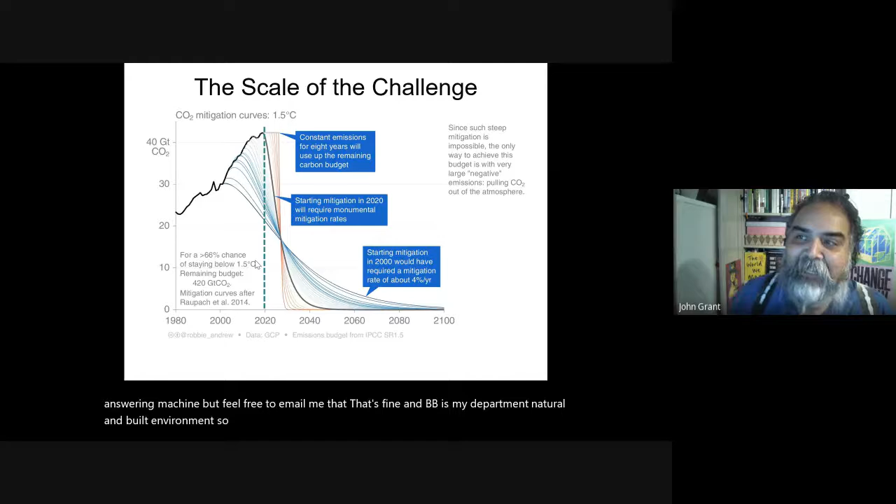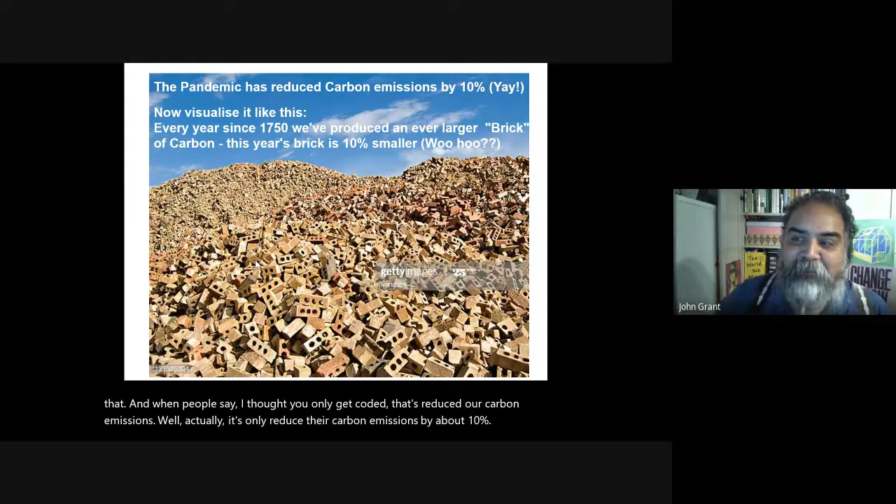So here we are in 2020, and this is our carbon reduction curve requirement. So if we're going to meet the 2050 target - and I don't know about you, but as much as I wish that humans are capable of great things, I find it an extraordinary curve for us to actually follow. And when people say, 'Oh, it's all right, John, we've had COVID, that's reduced our carbon emissions,' well actually it's only reduced our carbon emissions by about 10% for 2020. So if you imagine a brick of carbon being produced since 1750, then our 2020 brick is 10% smaller. And we're pretty confident now that extreme weather events are, in some calculations, 30 times more likely in the UK.

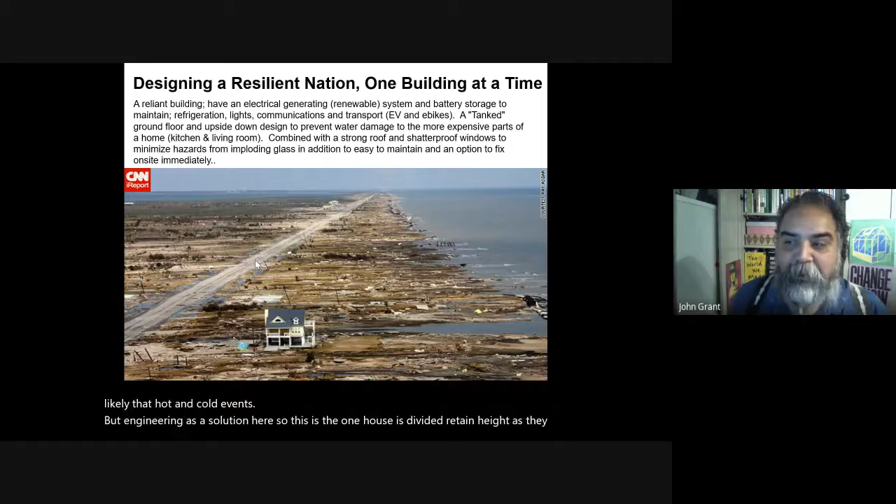Heavy rainfall events are 30 times more likely, and hot and cold events slightly less, but engineering has a solution here. This is the one house that survived Hurricane Ike because they'd sprung for the sustainable and resilience options on their house. I found it the most extraordinary picture.

That's what they were kind of talking about. It's not rocket science. Everything I'm about to talk about today is already developed. There's nothing novel.

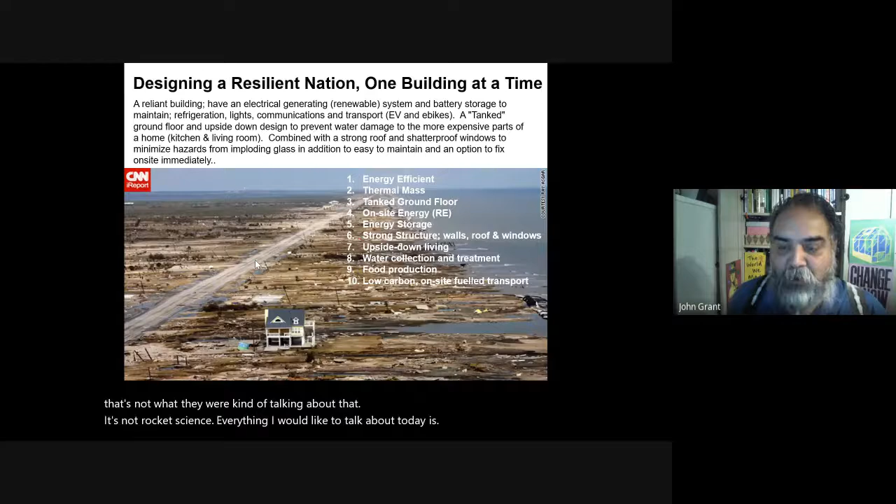Now, the government has proposed this as our 2030s house, and I find this sort of appallingly embarrassing, in that we've already surpassed this in every way, arguably 20 years ago. So this is their house for 10 years from now. But 26 years ago, the first autonomous house that I'm aware of in the UK, in Southwell, Nottinghamshire, was built by Robert and Brenda Vale.

This was autonomous in energy and water, not food, but highly insulated. And they, 6 years later, built these at Hockerton nearby, which actually, a bad year, get this, is 30 quid on utilities.

So this is a bungalow, earth sheltered, linear layout, so all the rooms face south, with a sun space that keeps it warm, and they have no primary heating source in there, just an insulated concrete box that uses the sun and ambient heat capture from uses within the building.

I've been following this for 20 years. I was actually involved in it, not in the construction, because that was the Vales, and it was a self-build, but I was involved in the renewable energy system. So I helped them with their wind turbines because they were having problems getting it through council.

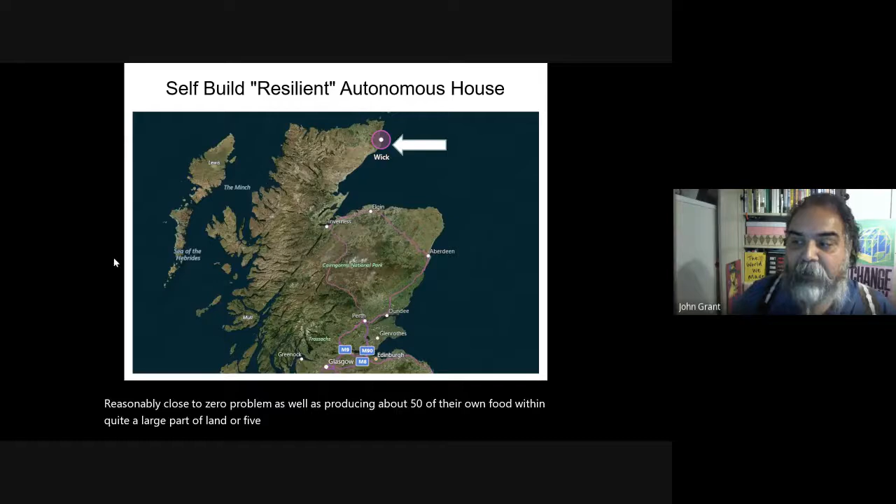So switching to my house, it's about as far north as you can get, Wick, about half an hour from John O'Groats, heading north from there. It's a great location, although not the most inspiring on the east coast. The reason I picked it was that the road's to the south of the plot, which means you can't build anything that will shade me, which was part of the design.

And there's a burn, as they're called up there—excuse my Scottish accent, I don't have one—which has got fresh water, which feeds into the local whiskey distillery. So it's good. It's good enough for them, it's good enough for me, is kind of the logic to that.

But quite a large site at almost a hectare, and only 30k. But don't share that, so I could repeat this. It's a public road on there and everything, and adjacent to the oldest castle in Scotland, would you believe? Which is the most boring castle—that's why nobody's ever heard of it. It's a really boring little brick square.

But yeah, so historical, and the fact that this house sits on a concrete raft made simplified matters with regards to digging that.

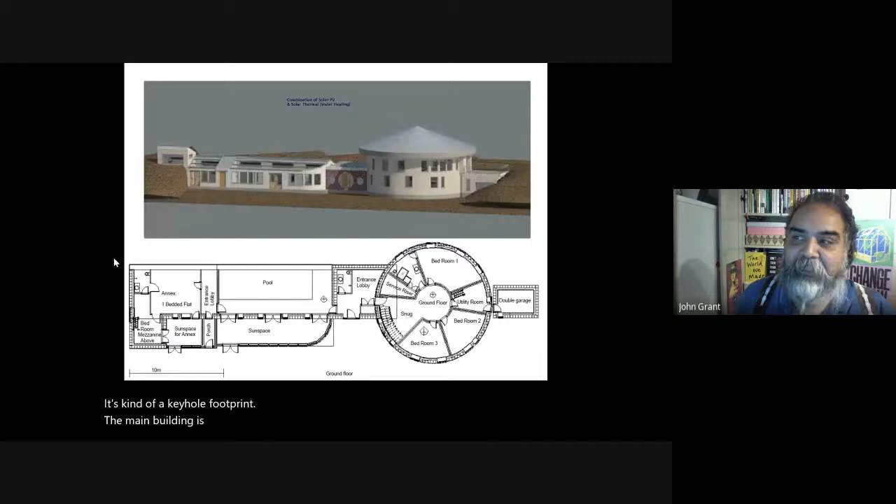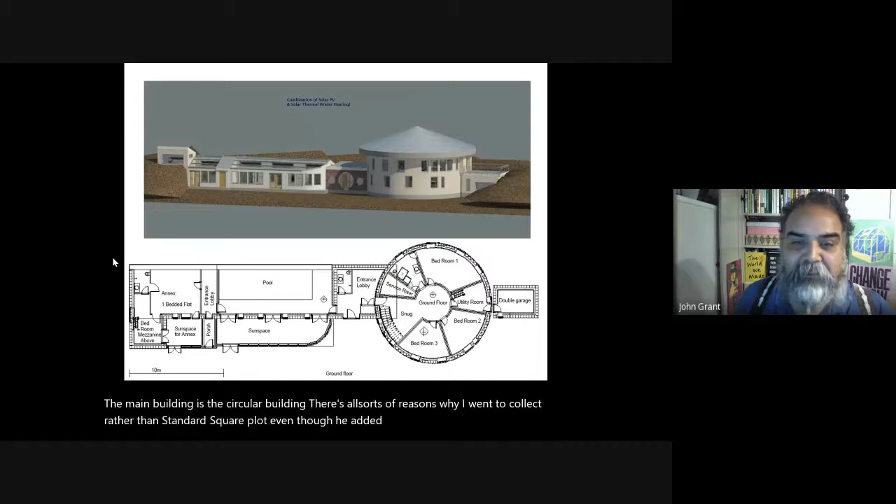So, no significant foundation - this is the design as it stands. It's kind of a keyhole footprint. The main building is the circular building, and there's all sorts of reasons why I went circular rather than a standard square plot, even though it added about 5 to 8% to the price. But I'm using insulated concrete formwork, which actually isn't as expensive to build curved walls with as it is with brick and block, and you get huge advantages in terms of structural strength.

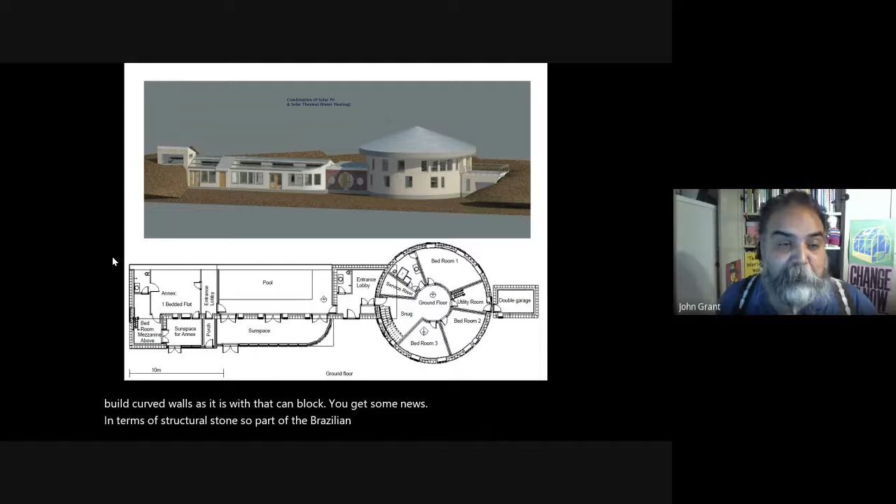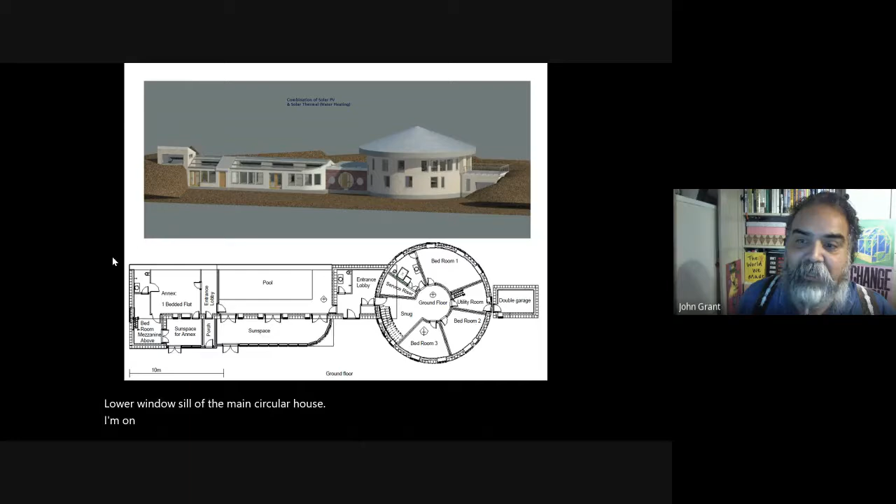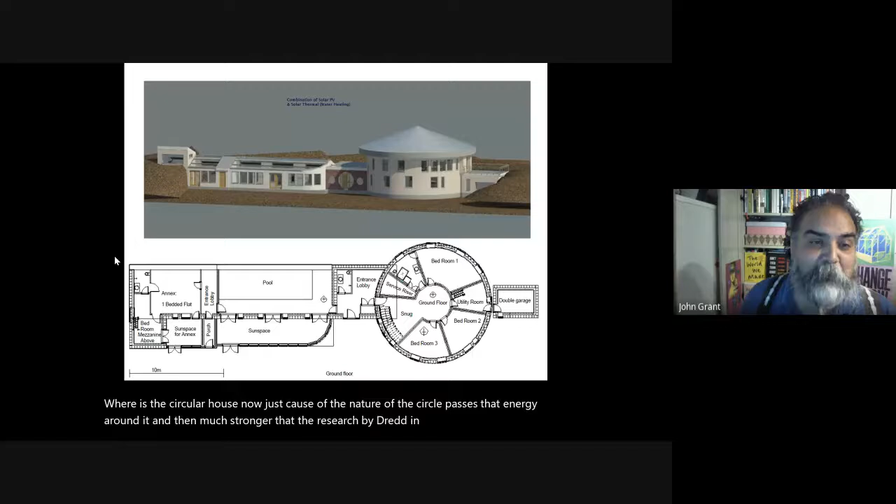Part of the resilience element of this is that it's flood-proof to the lower windowsill of the main circular house. If you build a house that is tanked, like an inverse swimming pool, and it's square, you have to really reinforce the walls because they buckle. Whereas a circular house, just because of the nature of the circle, passes that energy around it, and they're much stronger to that. Research by BRE, in their flood tank, built actual buildings and flooded them up to a meter and a half. They've been easily able to build buildings that are structurally and waterproof capable, but they crack over time, and that's not talked about much. So actually they've got strategies for letting the water in to equalize the pressure - I wasn't comfortable with that.

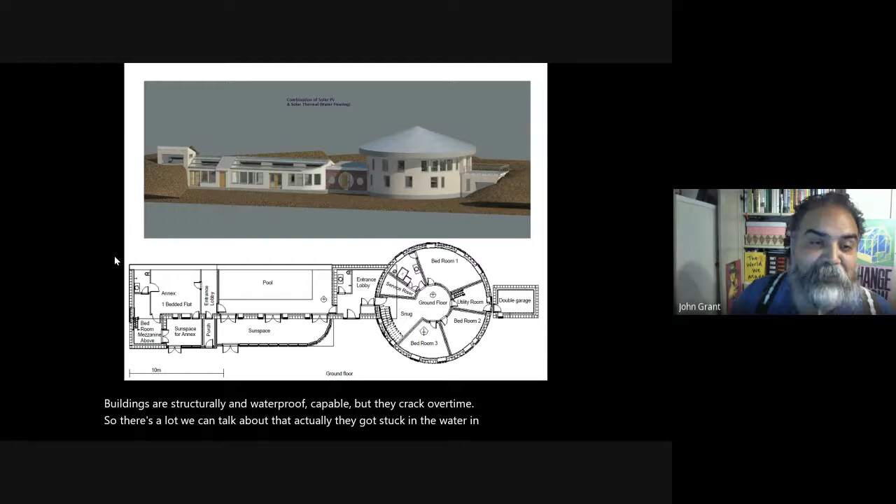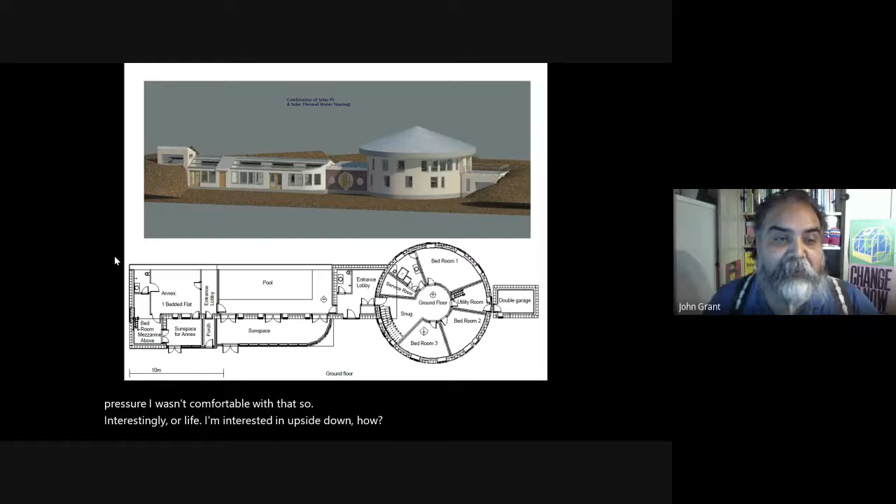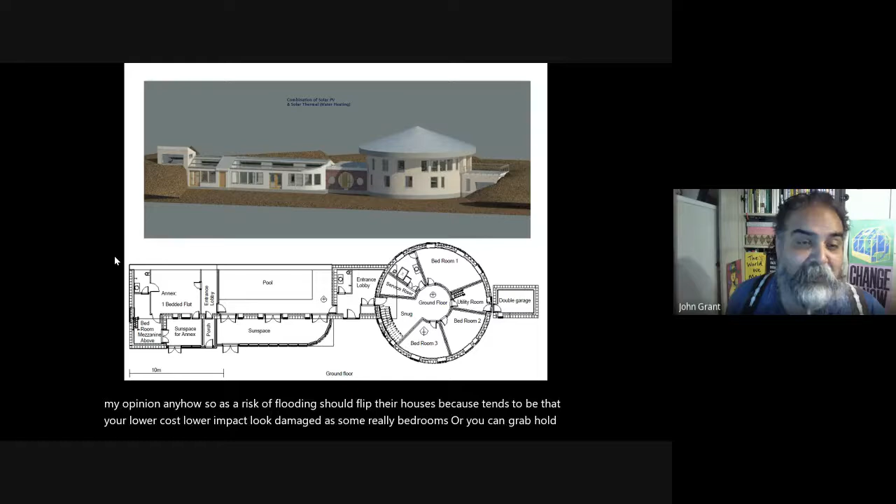So that's the main house. Interestingly, it's an upside down house - the bedrooms are downstairs, the living rooms are upstairs. Another flood resilient strategy, in my opinion: any house that has a risk of flooding should flip their rooms, because it tends to be that your lower cost, lower impact, flood-damaged items are in your bedrooms - you can grab hold of clothes, blankets and mattresses and drag them up the stairs. Whereas a chest freezer is a little more of a challenge taking up the stairs.

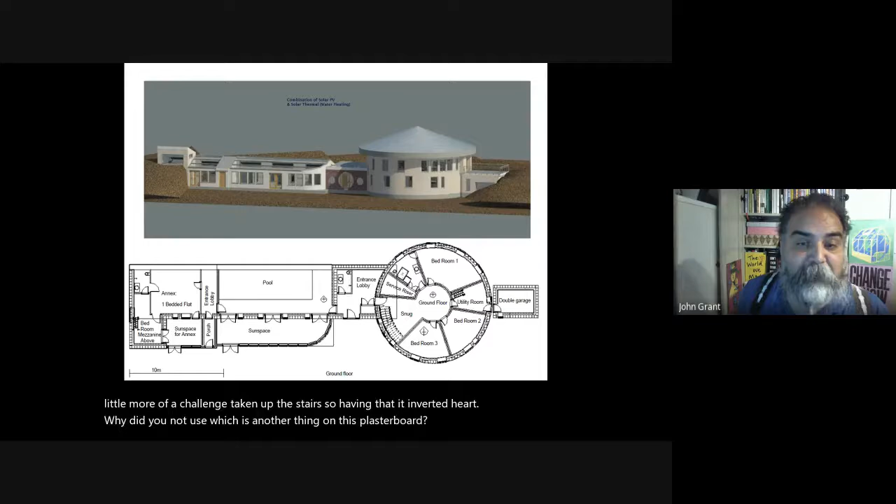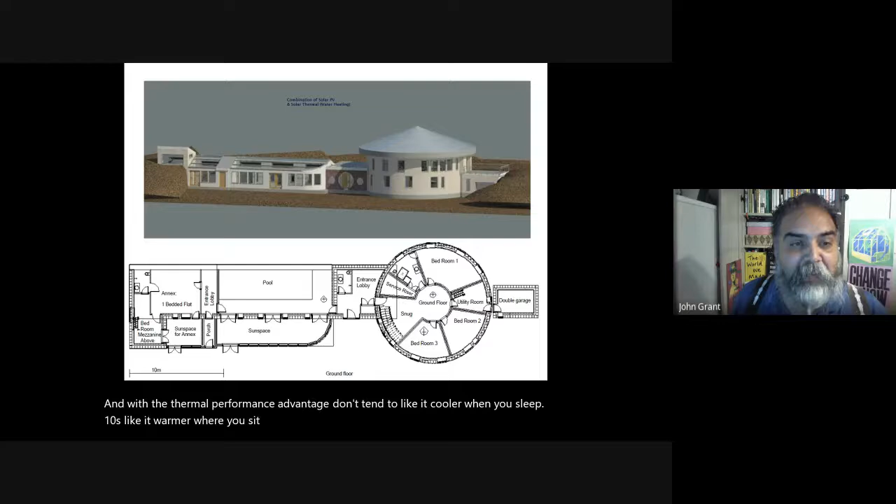So having that inverted house gives you a nice view, which was another thing - you'll be able to see the sea from this house, but it also makes it flood resilient. And there's a thermal performance advantage, since you tend to like it cooler where you sleep, and warmer where you sit in a sedentary fashion. If you flip the house, you've generally got a warmer upper floor, which will save you probably around 10% on your heating - not a massive amount, but every little counts.

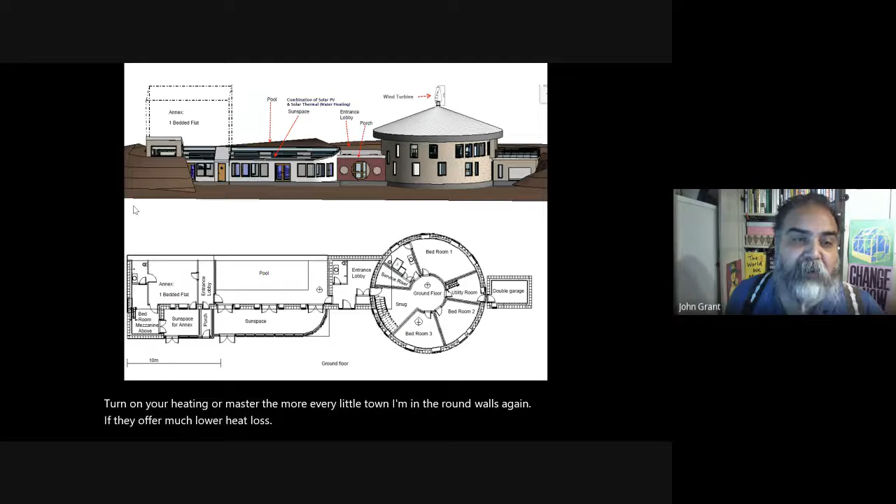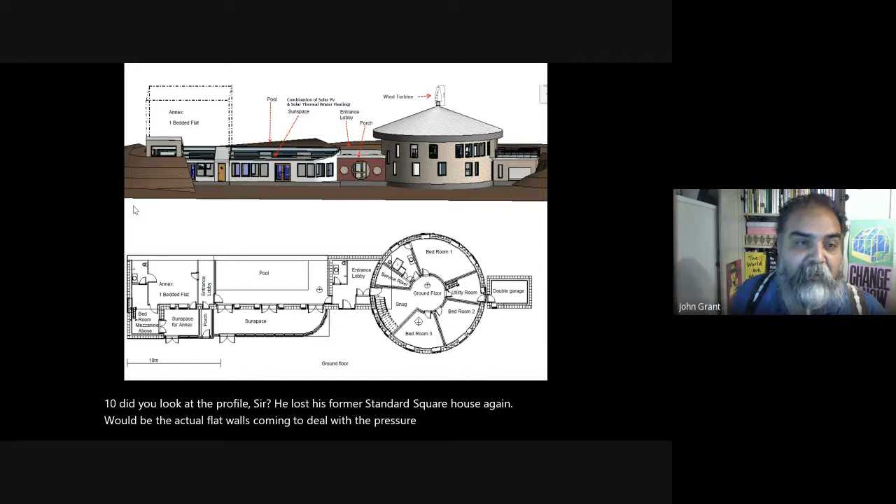And then the round walls again, they offer much lower heat loss. If you look at the profiles for heat losses from a standard square house, it's the corners that actually lose far more heat than the flat walls. It's something to do with the pressure differential on the corner, and the fact that on the corner your insulation doesn't work as well. So that's another reason why, if you've got the space, you go with a curved wall.

This is called insulated concrete formwork, and it comes out like giant Lego bricks - you build it by hand, then pump concrete into the core of it. So it's an incredibly fast build process. Now, if anybody's ever built in Scotland, they'll understand why that's important. Not only is this structural element really important, but you can extrude the insulating material - it looks like polystyrene, it's not, but it looks like polystyrene - at any angle, even in a curve, which makes a curved structure much easier. You can also throw the walls up and put the roof on within 2 weeks, and in Scotland, that's really important on a build, so that you're then working internally from that point onwards.

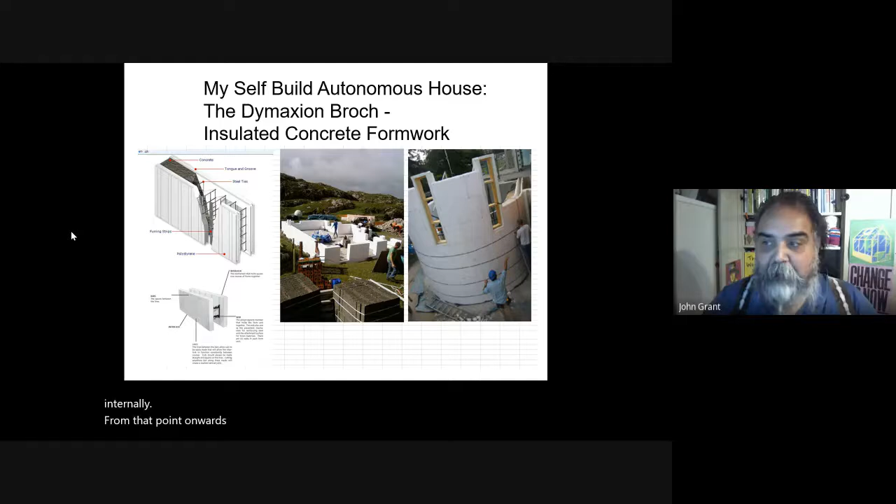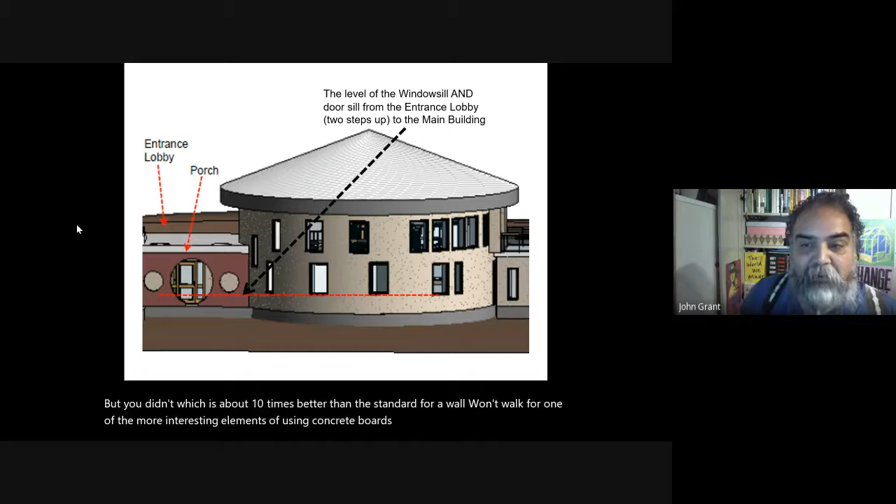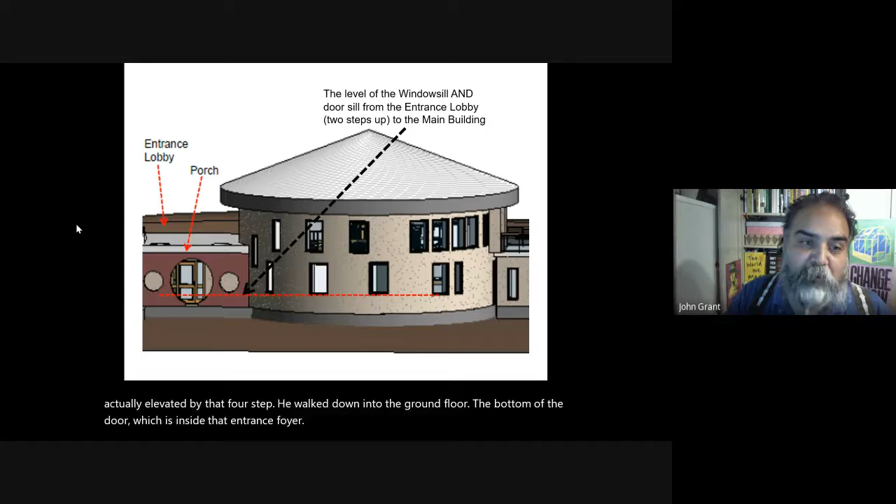So the bottom door, inside that entrance foyer, you walk in and then down three or four steps, depending on the depth of the steps, which I haven't quite decided on yet, down to the ground floor. What that means is you can literally take the flood water levels up to the windowsill and the water won't come in, because you've cast it like a cup, for all intents and purposes, in a single pour.

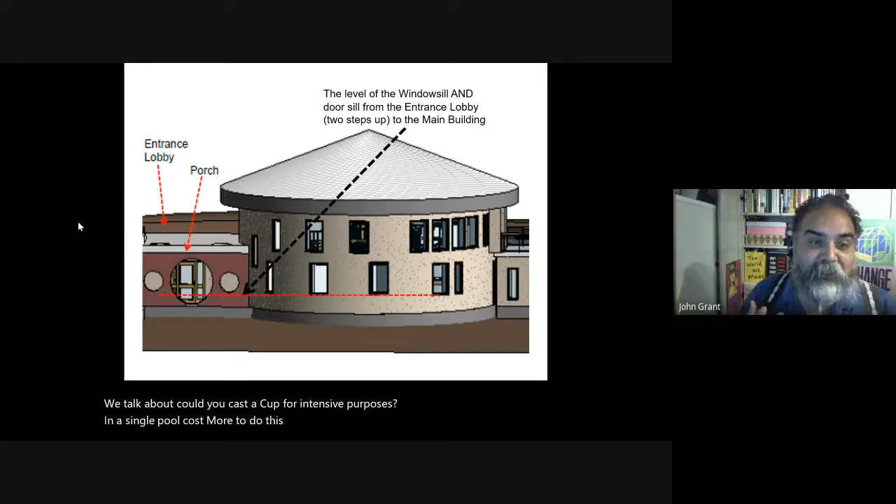And it costs no more to do this. I find it extraordinary that this isn't just a standard strategy employed in any location that's on a floodplain with a reasonable risk of flooding. Because yes, it's four steps up and then four steps down, but what you've got there is about a meter of give in terms of the flooding.

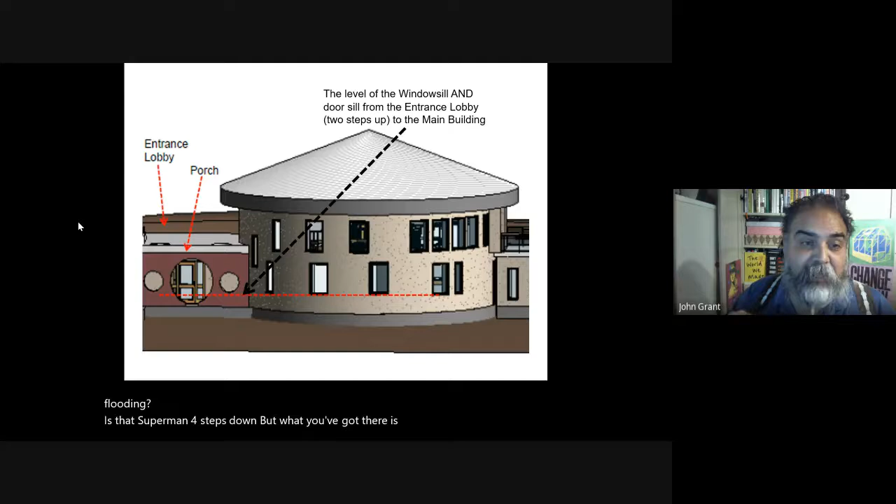If you look at the statistics on what most houses get flooded by, it isn't up to the second floor window, although that does happen. It tends to be 300 mil to about 600 mil flood level. So if you go up to 1,000 mil, you've made that building resilient to most floods.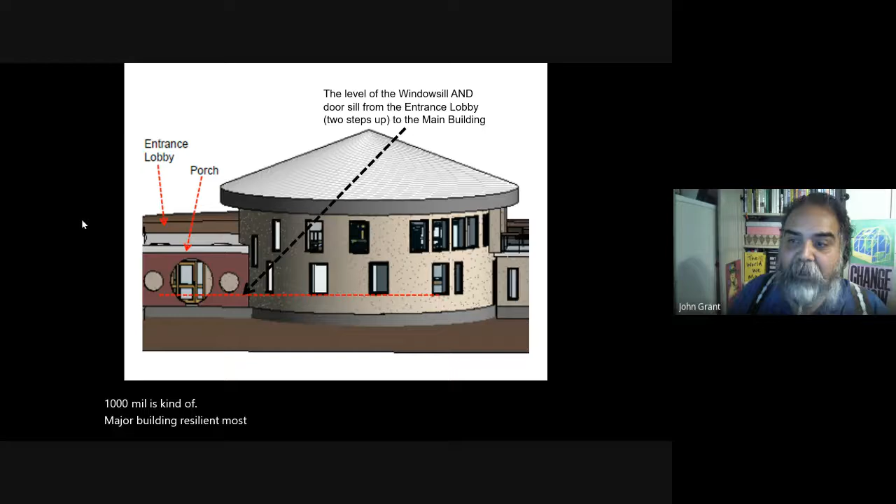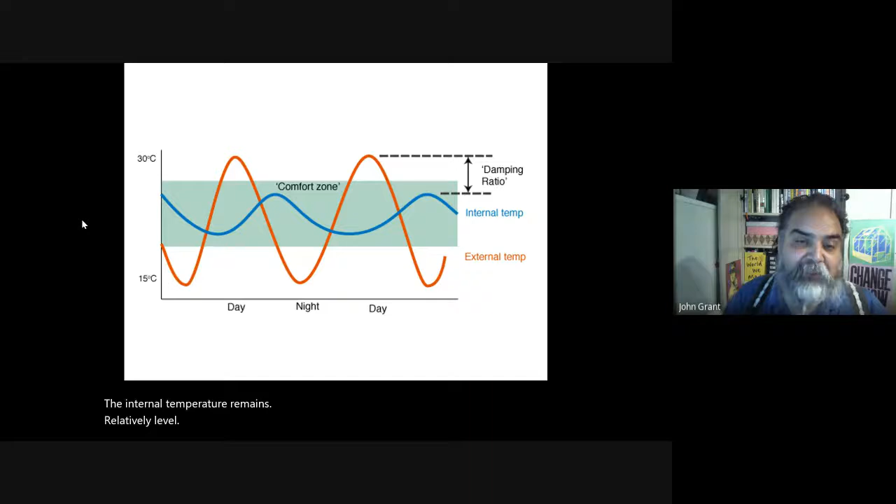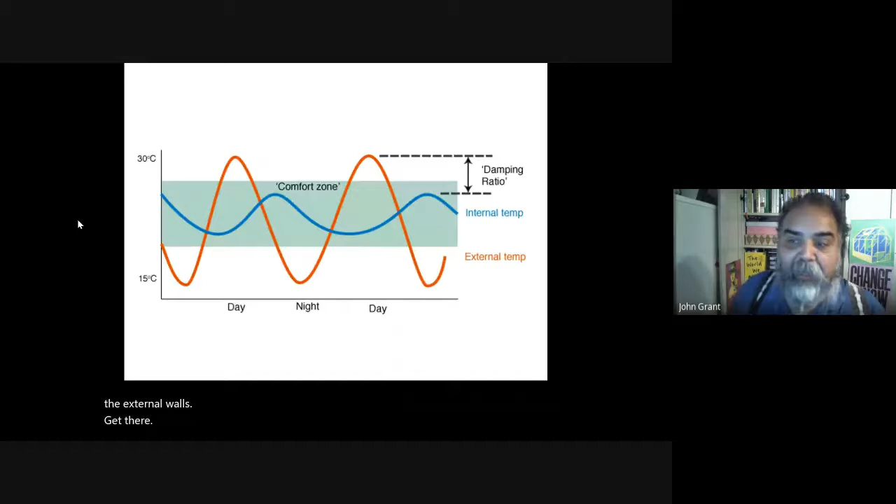So let's say the house uses thermal mass just like the Hockerton houses I showed you before. The game is that no matter what the external temperature is doing, the internal temperature remains relatively level. But the walls are actually insulated inside and out, so you're not using the thermal mass of the external walls - they're just structural.

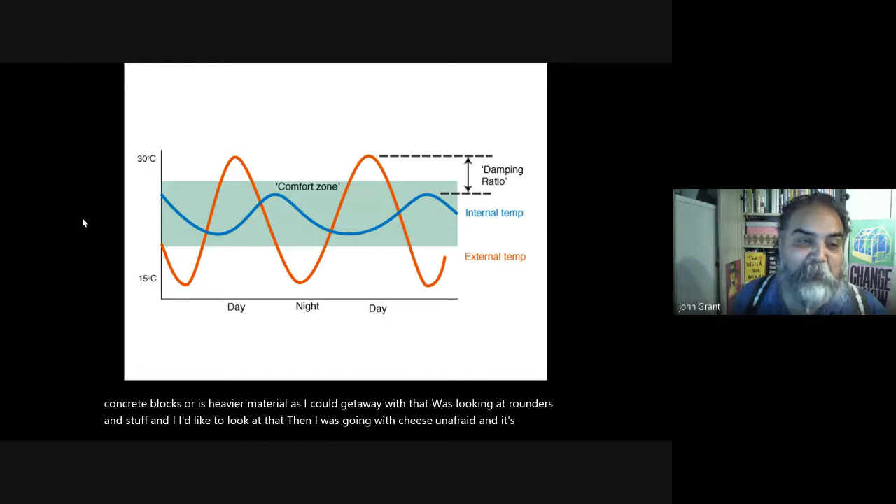Interestingly, the ground floor walls are built almost the wrong way around, out of super heavy brick blocks. So the internal walls between the rooms are made of heavy concrete blocks, or as heavy a material as I can get away with. I was looking at rammed earth and I'd like to look at that, but I was going with cheap I'm afraid, and it's much easier building, especially when your brickies are working indoors - remember you've got that in Scotland as well.

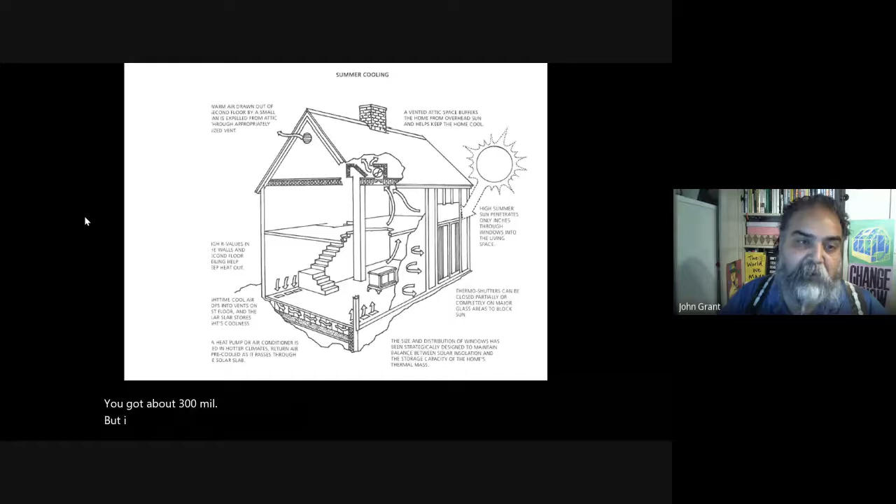So it's all turned around with that, and then I'm also stealing from the Romans and going with a hypocaust underneath the floor of this building. So what we're doing here is pushing warm air underneath the floor, where you've got about 300 mil of concrete below and 300 mil concrete above, and so that floor becomes the entire building's radiator, as you work it out.

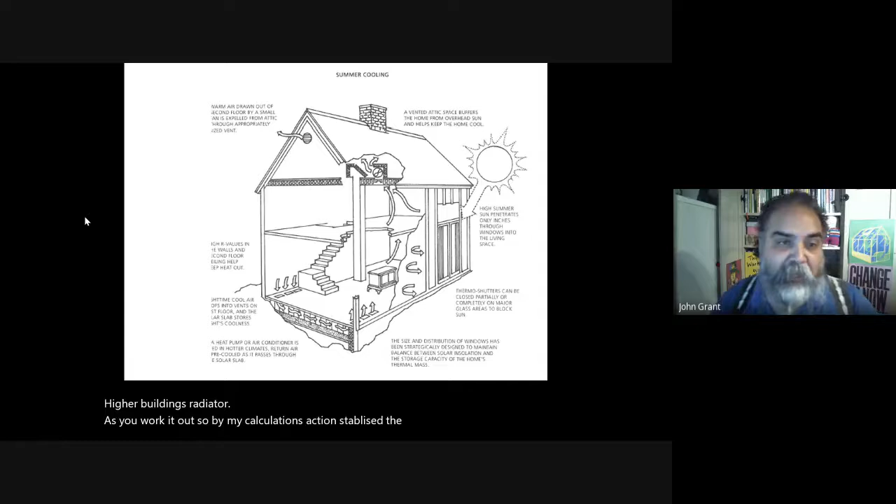By my calculations, that should stabilize the temperature no matter what it's doing outside, because you've got an ultra low U value, so gaining heat or losing heat externally - the windows are shuttered, which we'll show you in a moment - so you can get away with that.

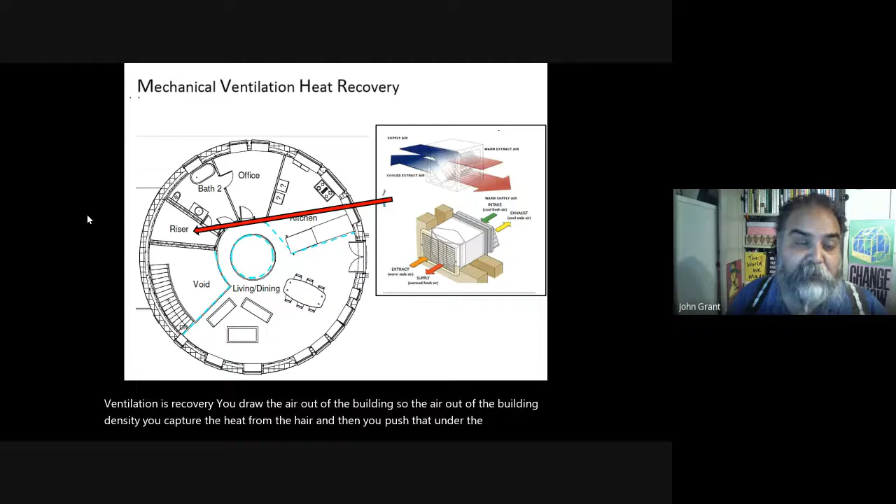And then what I want to do is use mechanical ventilation and heat recovery. So you draw the air out of the building and vent it, but you capture the heat from that air, and then push that under the floor - under the middle of the circle - and then the air just moves outwards from the center where it vents.

And this building, I've been really decadent - it's actually got a service riser. So there's a two-story high room where all the services come in and are distributed around the house. What it means is the electrics, water, plumbing are all internal in the building. I expect it to take a day and a half, two days to put it all in across the building.

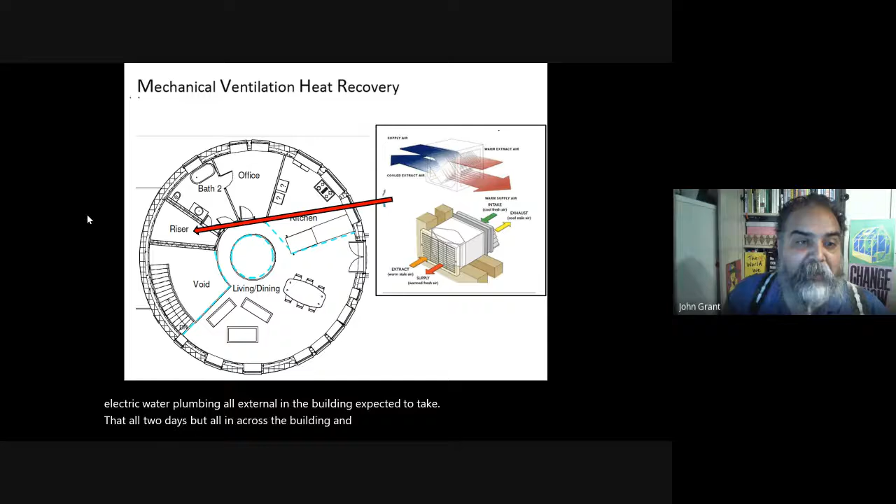And they're all exposed, which are then covered by ducting at ground level, and that doubles as a seat all the way around the perimeter of the house, but also storage - so it's about doubling it up. My wife said there better not be a shortage of storage. I've seen modern houses, and there's a vast amount of storage in there, but all the pipe work and electrics are exposed, so you can keep them secure and do the maintenance.

It's a house for an aging person, as I am or will be, and so I wanted the maintenance to be very, very simple. I'm a great believer in the keep it simple, stupid - KISS - principle for the design of things. And so all the plumbing's external in the void, so all the toilets are against the riser.

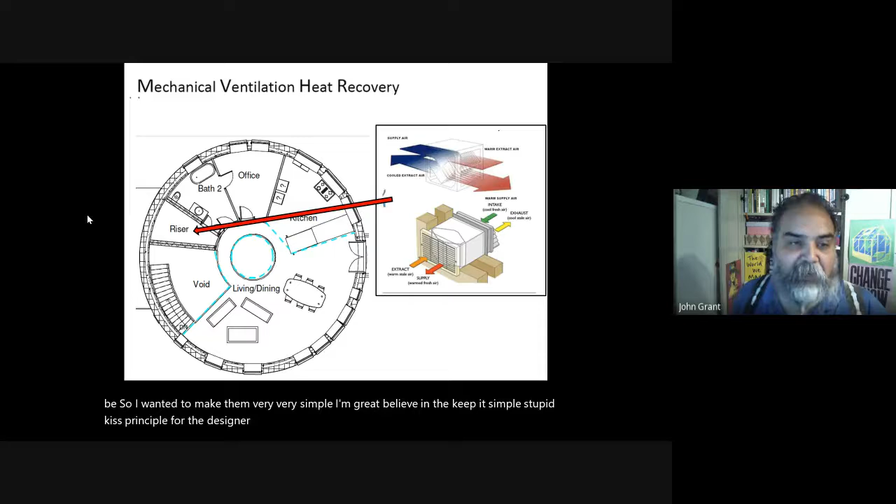And so all their cisterns, all the water supply, the plumbing, the dishwasher, the washing machine is all in the riser as well. So all the water is kept in there. And so if you've got a flood, it's all contained in that room as well. So it kind of manages that as well as dealing with it.

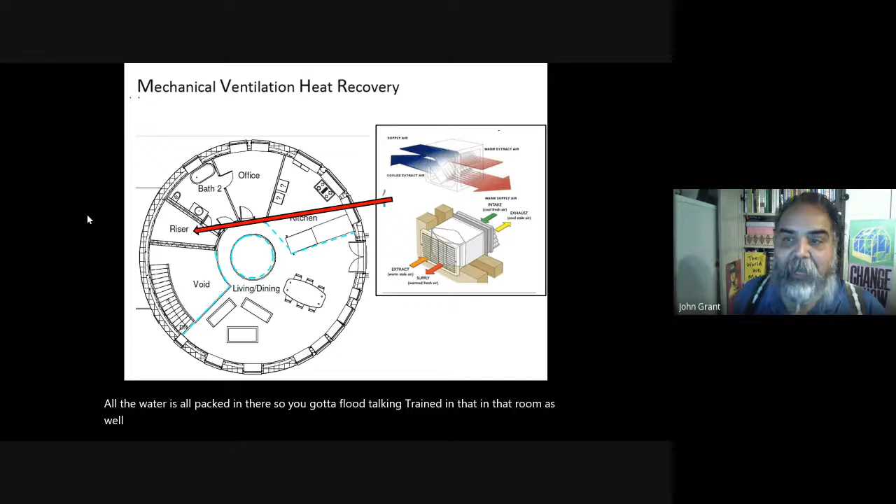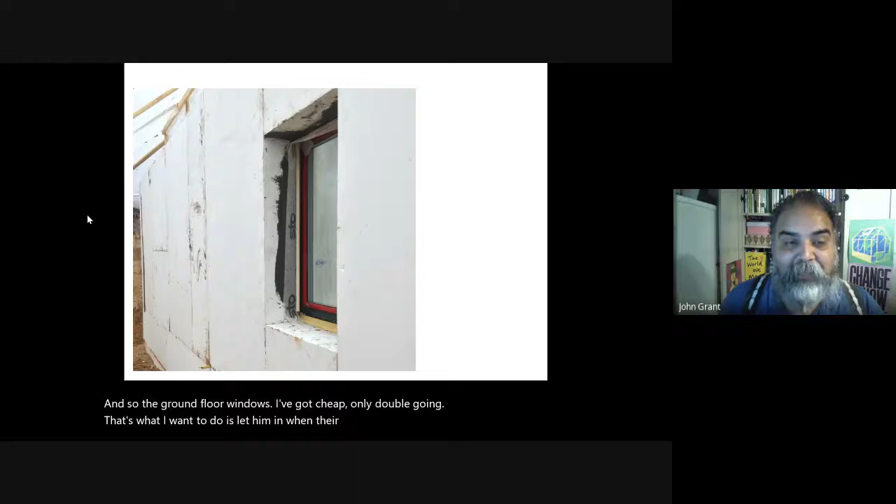Now the windows, they're quite interesting. I stole this one from Canada, that they're all recessed. And the ground floor windows, I've gone cheap, it's only double glazed, because what I want to do is let heat in when there's heat to be had. People often miss this point, that if you put a triple glazed window in, yes it keeps the heat in, but it also stops sunlight from entering the building. Every pane of glass, you'll lose about 10% of the potential insolation gain of the building.

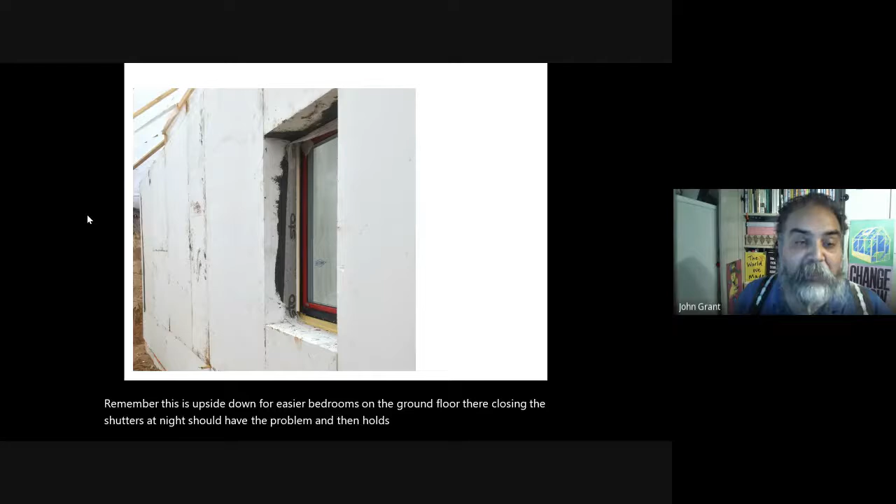So I kept it double glazed and recessed the windows, and put a really efficient shutter around the ground floor. Remember, this is upside down, so these are your bedrooms on the ground floor. Closing the shutters at night shouldn't be a problem, and that holds the heat in the building. And then the upper floors, that's where I've sprung a bit extra, so there it is triple glazed, and they don't lose heat as much. So it's this idea of having this lower and upper floor treatment, but the windows will perform as good as the walls when you do it.

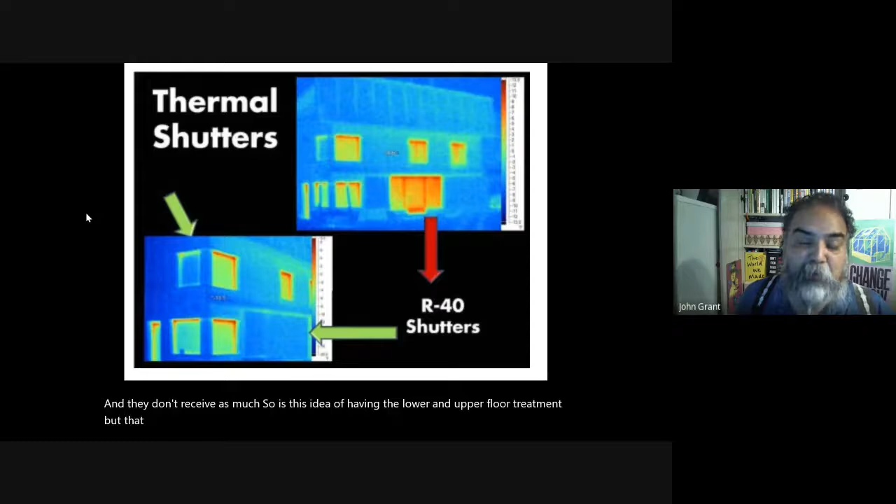The roof, moving on to the roof, is just a single cast concrete unit. I know it sounds kind of crazy, but it's a single unit. By my calculations, it's about 12 ton. So that ain't blowing off.

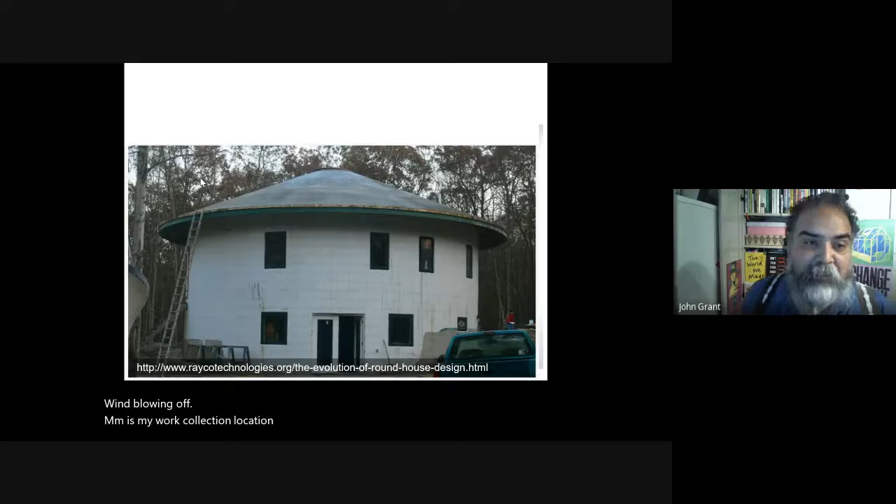It's my water collection location as well. So I've got a coating that is designed for rainwater collection for potable water. You paint it over the top, it's got a 50-year lifetime associated with it. And so you get no leachate out of the concrete, which is a bit... I mean, you can put waterproof additives into concrete, and generally I've seen people collect rainwater off concrete, but this is my home, so I went for that.

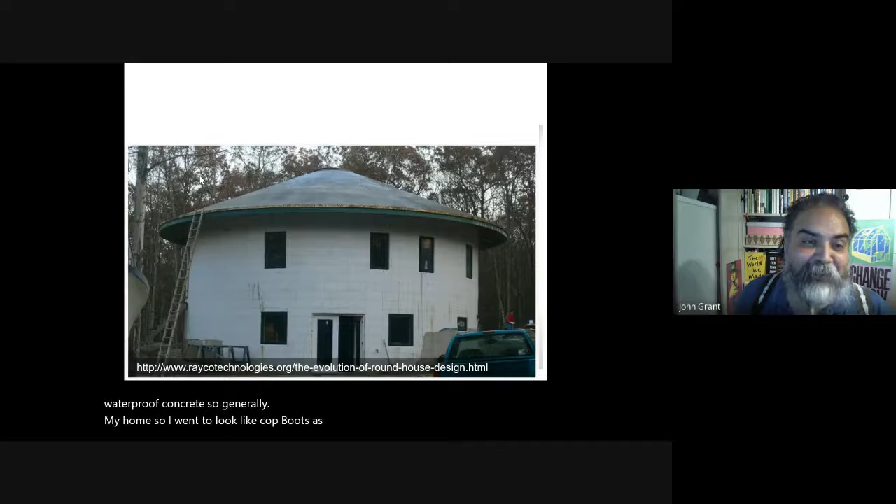It looks like a copper roof as well, not that, it's got that green color to it when it's painted. So my rainwater will be collected off this roof, as well as it acting, by my calculations, when it's tied down the way I want to, at category 5 hurricane strength.

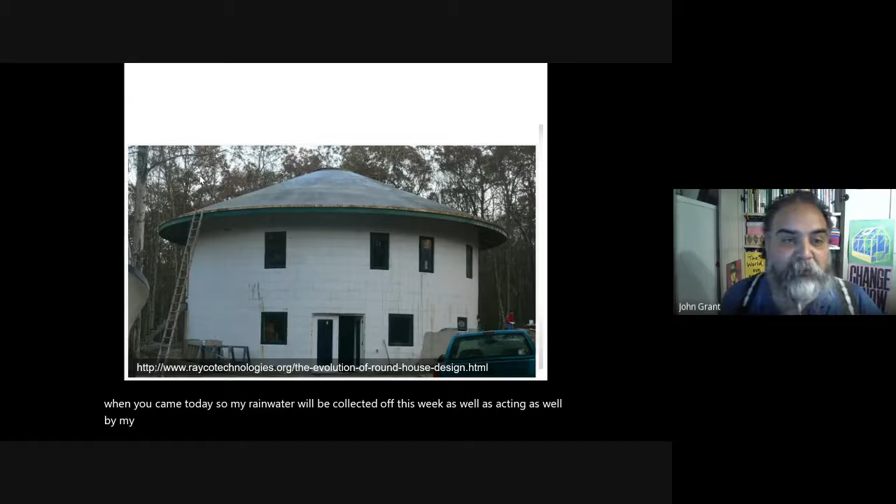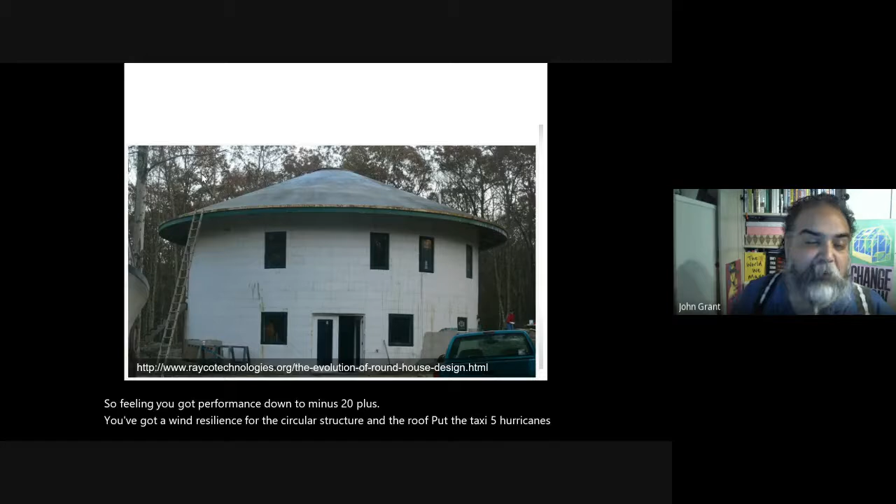So you've got thermal performance down to -20 up to +40. You've got wind resilience with the circular structure and the roof up to category 5 hurricanes for the main part of the building. The rest of the buildings are quite low, so I'm hoping they'd be able to duck that. So again, we're working.

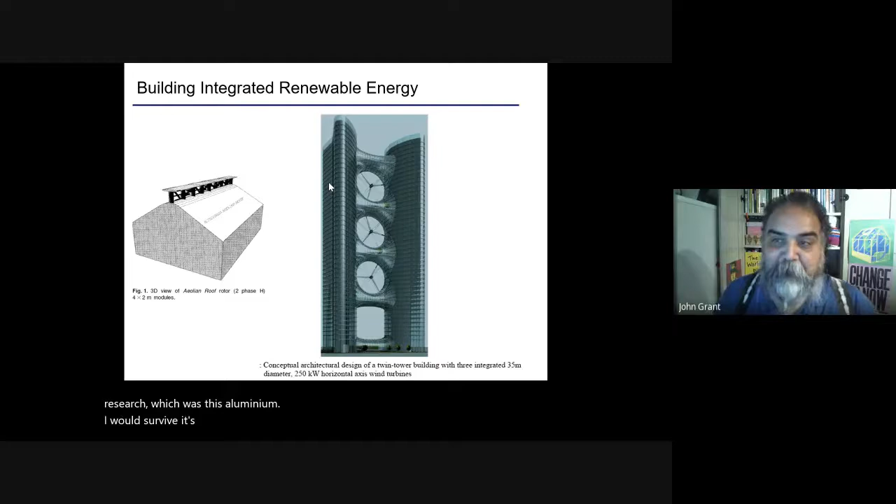So I've been talking about flooding, but there are other climatic elements. And with the fact that it's got a cone roof, I've decided to take this PhD research, an Aeolian, I don't know how you say it, wind turbine integrated roof, which was quite interesting. The idea is that you've got a vertical axis turbine, and the logic is that it negates the turbulence that you normally get off a roof.

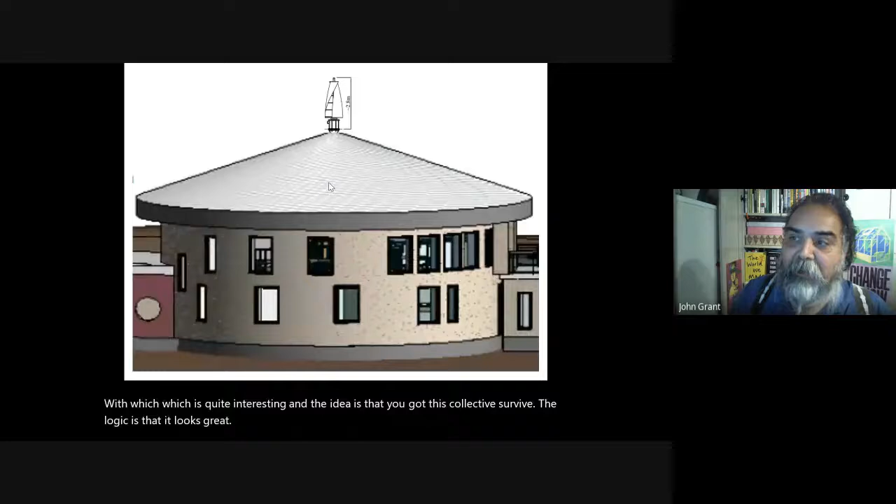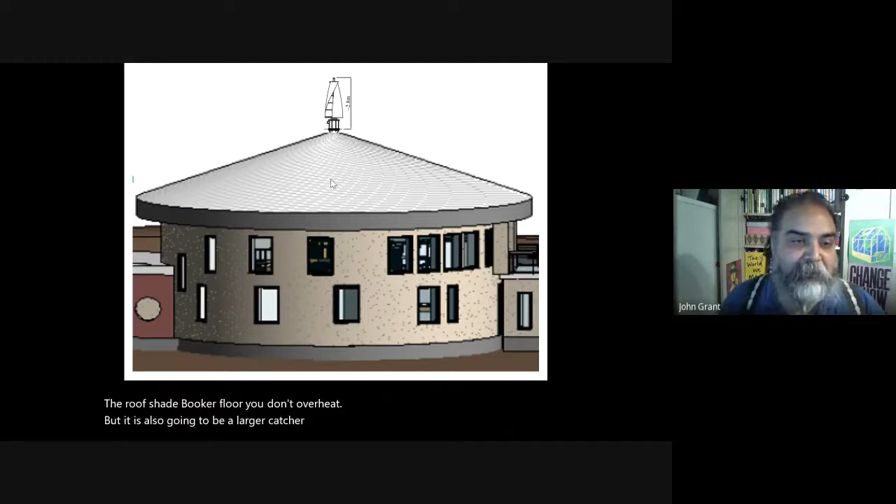So the roof overhangs quite significantly so that you don't overheat the building, but you can still leave the windows unshuttered, which is kind of important. So in the summer, the roof shades the upper floor so you don't overheat. But this also gives you a larger capture area, or a turbulence area, which will flatten or get rid of that turbulence. So this vertical axis wind turbine should work as well as it would on top of a big stick, on top of a tower.

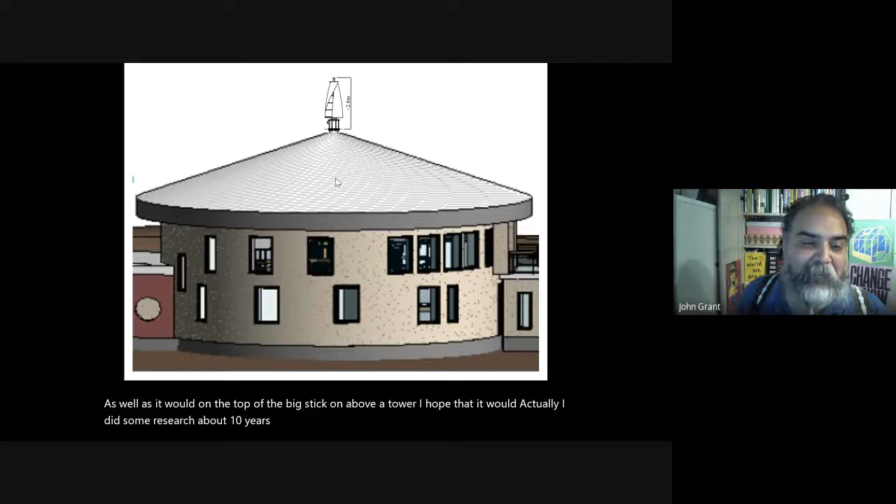I'd hoped that it would, actually. I did some research about 10 years ago where we had a wedge-shaped building, and the wind blowing up the wedge actually improved the performance of the turbine 3 or 4 times. And I was really excited when I got a cone roof, and I thought, oh, this is it, I'm going to get 3 or 4 times the output.

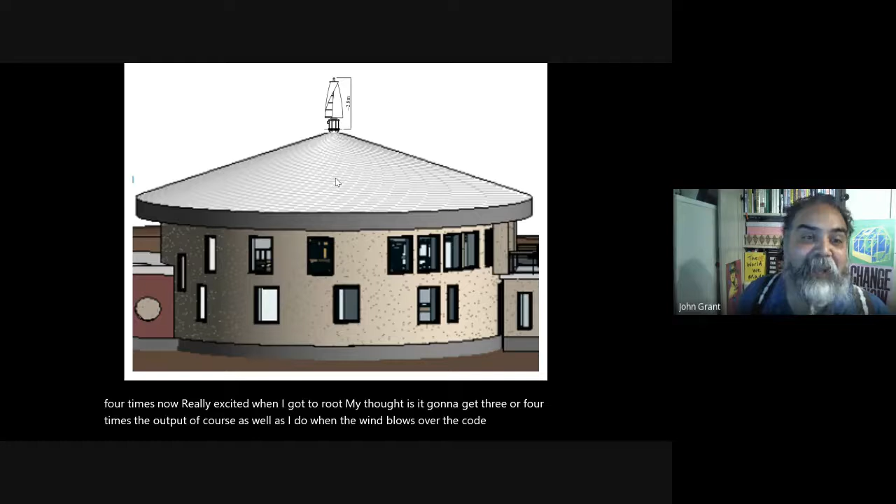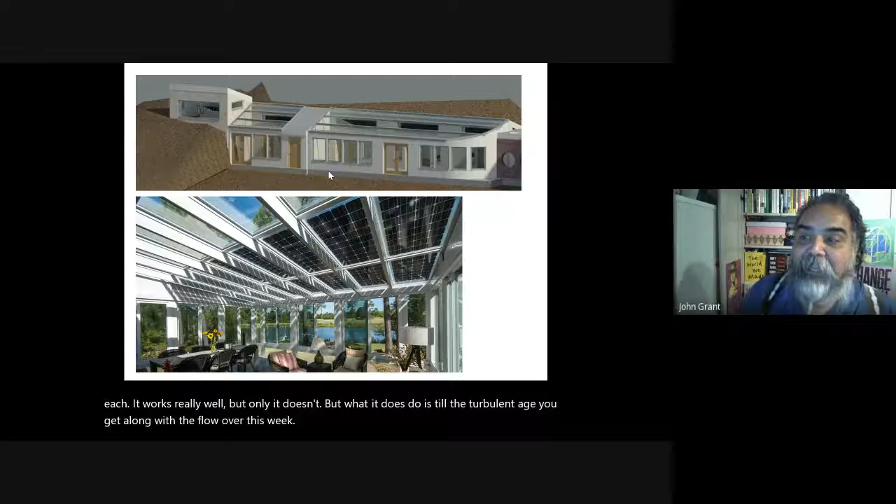And of course, you know as well as I do that when the wind blows over a cone like that, the wind slips either side of the turbine, annoyingly, and doesn't get concentrated over the ridge. So on a ridge it works really well, on a cone it doesn't. But what it does do is kill the turbulence, so you get a laminar flow over this roof, which I'm quite hopeful about. And the turbine itself is called Windside, it comes out of Denmark, Finland.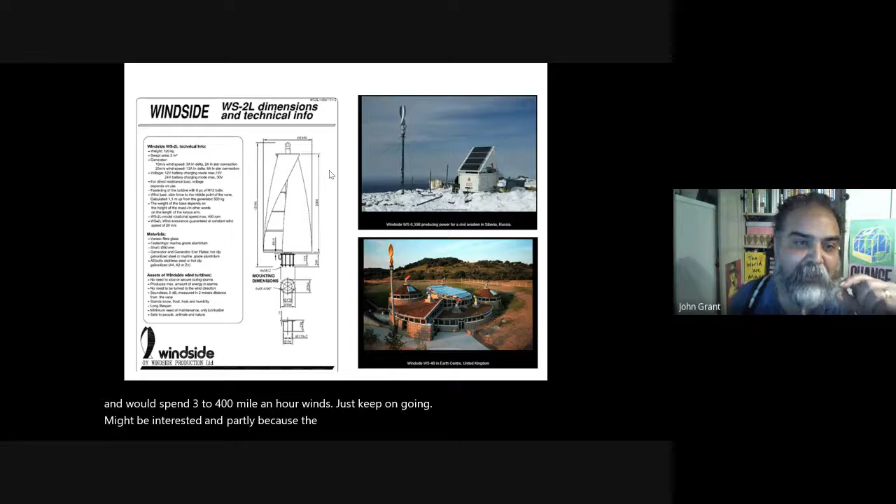The magnets are not actually in contact with the electric motor. They just spin above it and they're hovered there. So you don't get any noise to speak of either, just the blade wind noise.

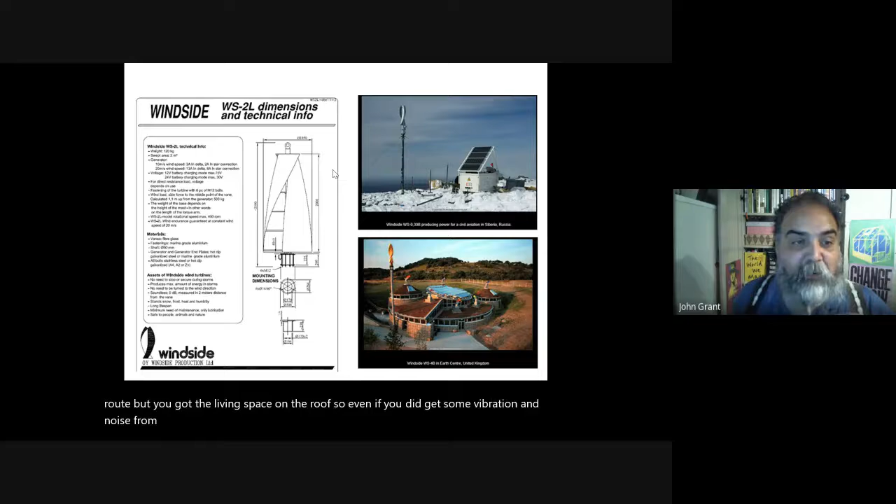But remember, I put the wind turbine on the roof, and you've got the living space on the roof. So even if you did get some vibration and noise, that's where you're awake, and you go downstairs to the ground floor for sleeping. So it's my hope that any problems from a wind turbine integrated into a building will be negated. I will also be putting some dampers in there to stop that.

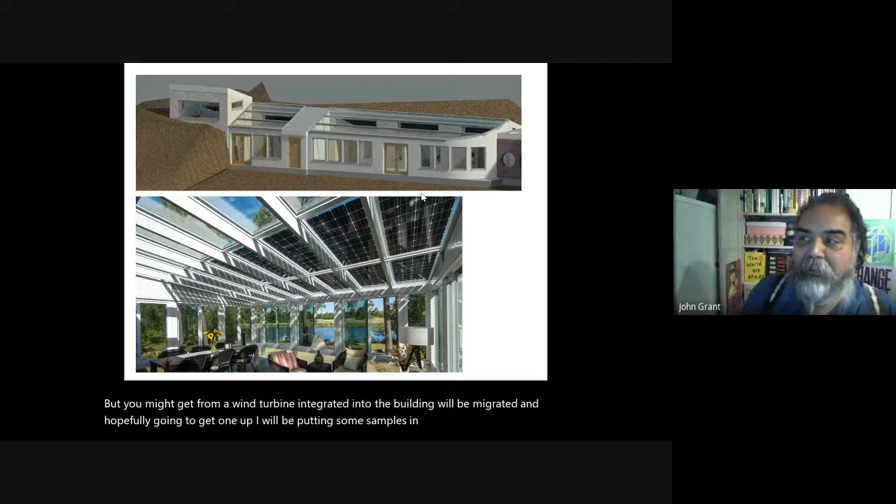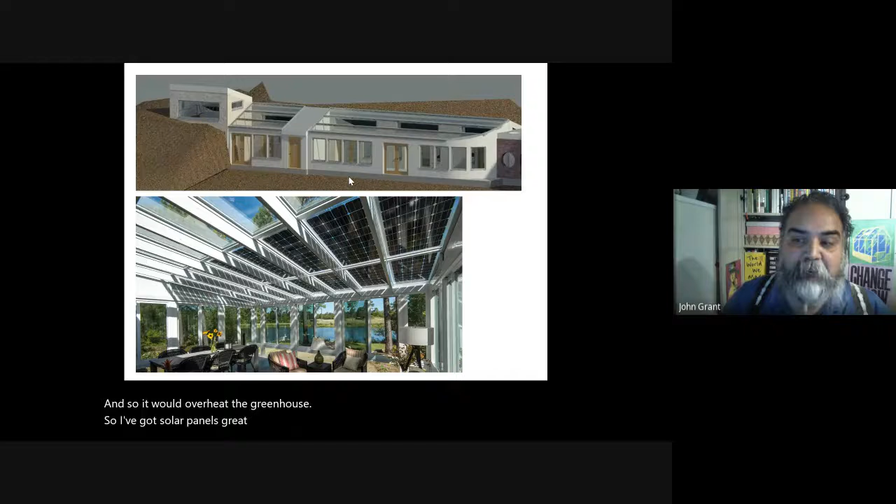I haven't talked a lot about the keyhole element, but the greenhouse has solar panels integrated into the roof. We're dealing with Scotland here, so in summer the sun's very high and it would overheat the greenhouse. So I've got solar panels integrated so it shades the greenhouse. But in winter, when I'm looking to maximize greenhouse output, the front facing element lets the sun come in.

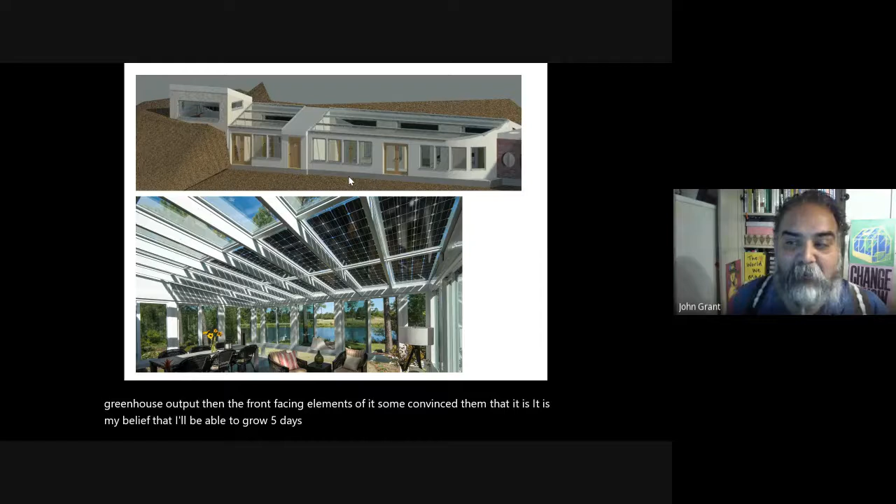And it is my belief that I'll be able to grow 365 days of the year using that. One of my PhD research areas is actually a method of growing without soil called aquaponics, which uses fish and plants as a closed cycle food production. As such, the plants in the greenhouse have no soil, but they're fed from, and you'll laugh now, a freshwater swimming pool.

So my wife calls it a freshwater swimming pool. I call it a thermal... oh my goodness, sorry, I've got this thing on a timer that's supposed to keep me in time, but I'm obviously speaking too slowly. So it's a freshwater swimming pool developed by a Somerset company about... oh no, it must be about 10 years ago.

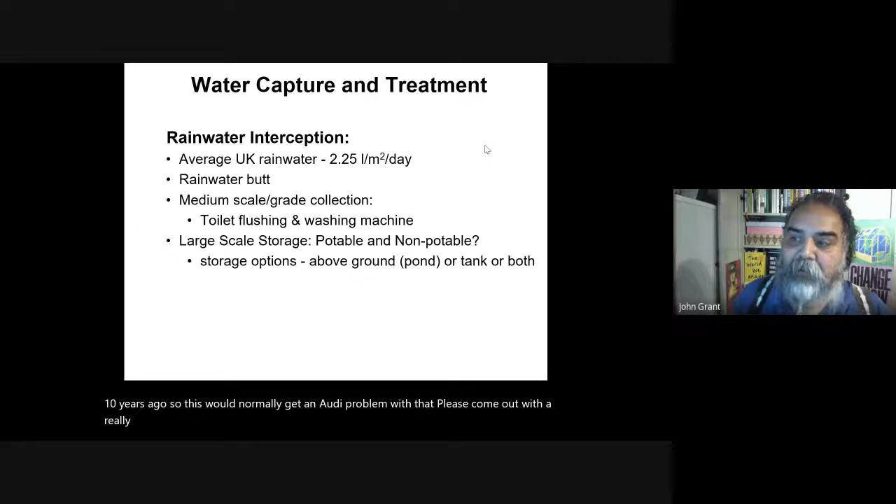So with freshwater, normally you get an algae problem. They've come out with a really interesting solution in that they use a biofilter to pull the phosphorus out of the water, which means you get very low algal growth. This water is technically potable, although I have a separate potable supply. What I'm doing with this one is a settling system — this will heat up through the summer and act as a thermal store for the rest of the house.

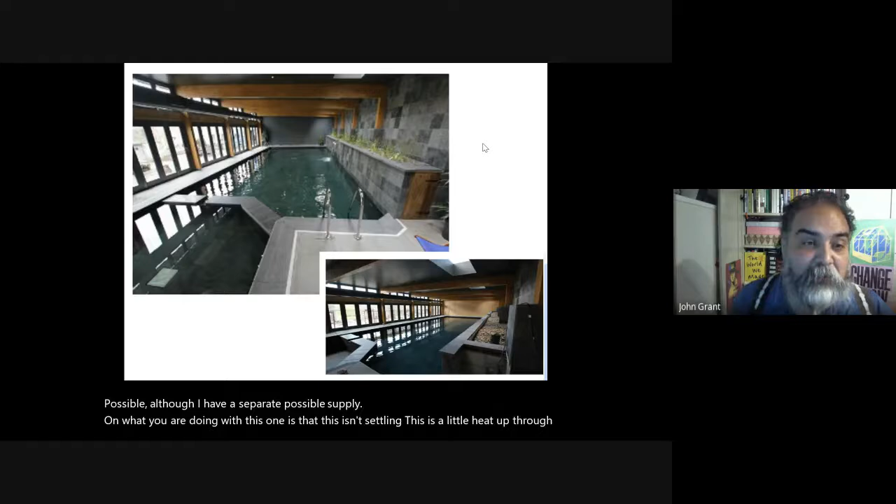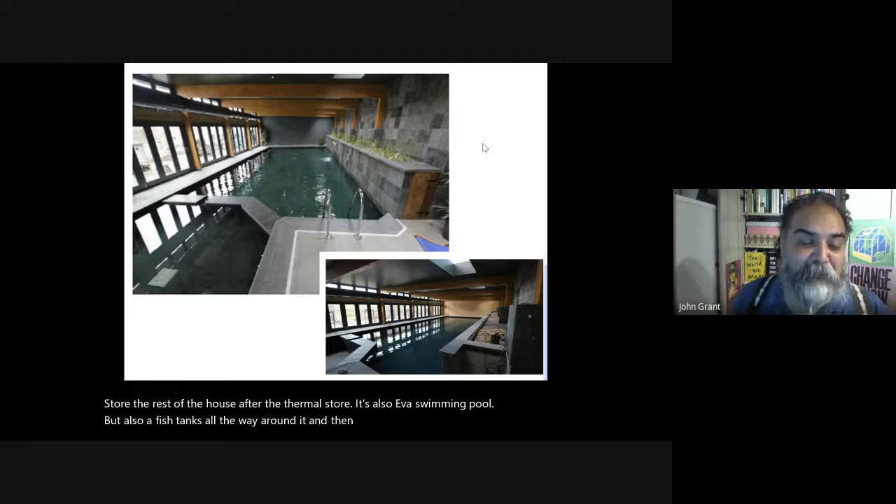It is a swimming pool, 10 meters by 3 meters. But I also have fish tanks all the way around it, and the fish poo water goes out through the plants, gets cleaned by the plants, and is returned to this swimming pool clean, then gets pumped back into the fish.

And that's the cycle. So it produces my food, it levels my temperature, and supplies me with all my non-potable water for the house. And it's designed in a way that... let me show you this.

It's designed so that once the level reaches 1 meter deep at the deepest point, you're not allowed to swim in it anymore — it just becomes a water store. This lets you visualize how much water you're actually using as a household. Use too much, you lose your pool. You're not going to run out of water because there's still quite a lot left in the pool, but you've lost that leisure activity.

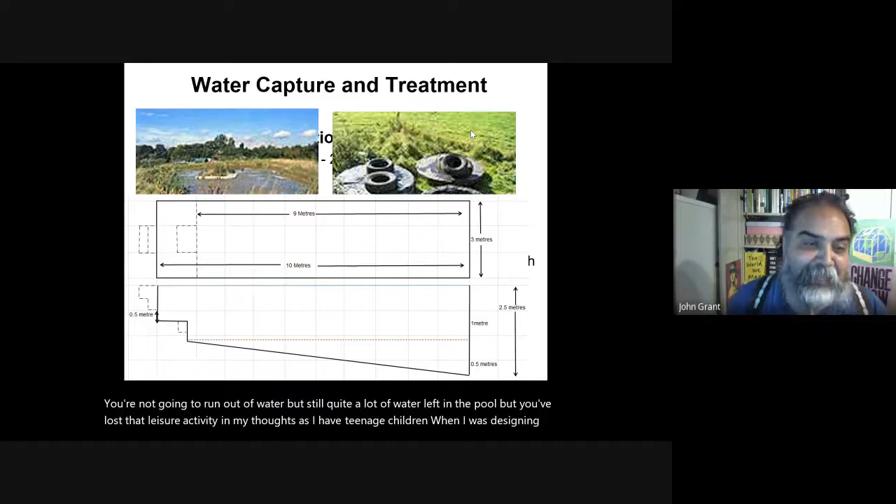My thoughts, because I had teenage children when I was designing this, were: how do I make them see how much water they are using? The way you do that is to have an open air store. The more you use, the lower the pool goes down and the less chance you have of swimming in it. So that was my kind of logic to that.

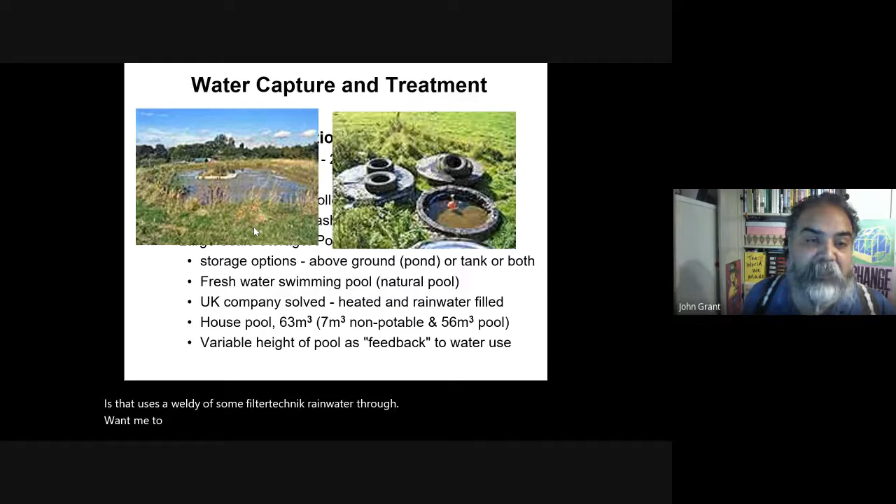Water treatment for the non-potable store uses a well-used sand filter technique — rainwater through a 1 meter sand filter, which has been used for 20 years at Hockerton for non-potable water and works fine in a UK climate. A little more challenging in hotter climates, but where it's reasonably cool, you don't get the bacterial element, and the schmutzdecke layer that forms on top of the sand is enough to keep it safe for UK non-potable uses — dishwasher, washing machine, shower, all that kind of stuff.

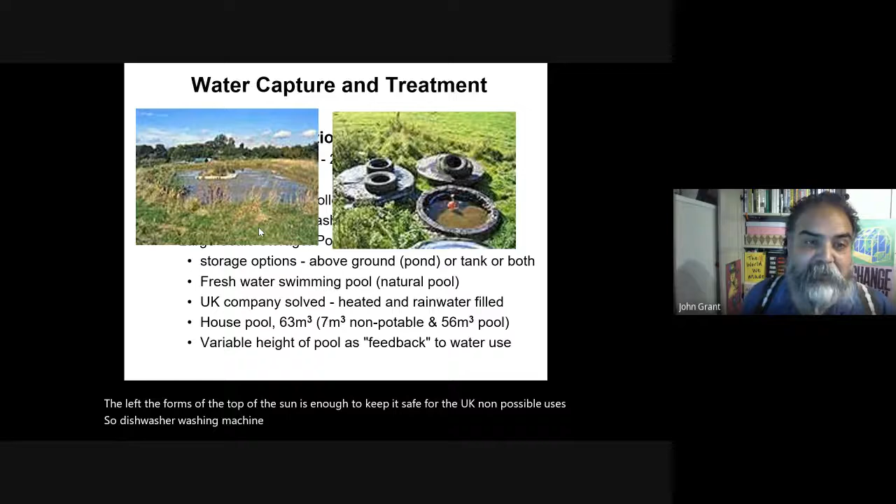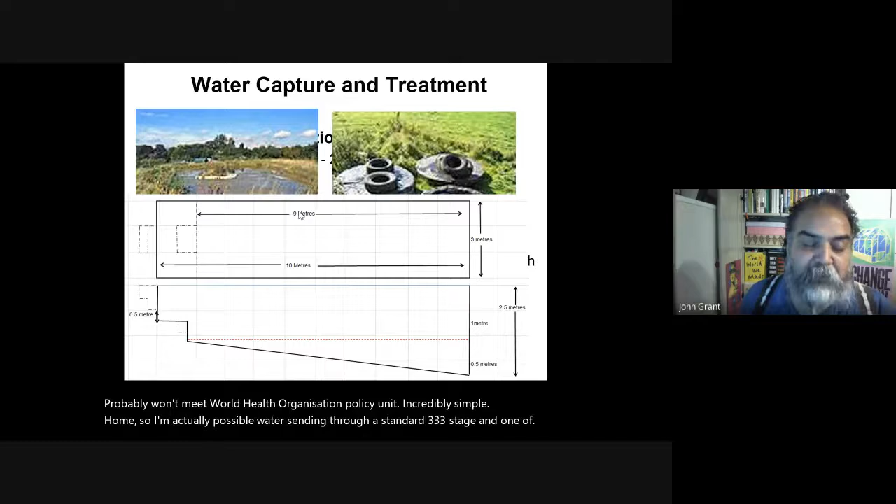It probably won't meet World Health Organization potability, and it's incredibly simple. The actual potable water I'm sending through a standard three-stage filter: string filter, carbon filter, and UV filter for drinking, which is off the shelf and about 300 quid a year to maintain. So my potable water goes through that, and my non-potable water is kept in this fresh water.

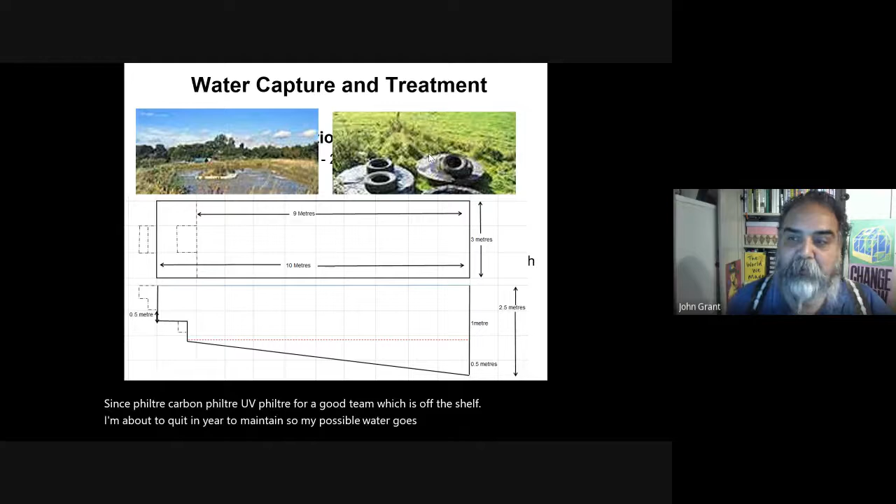By the way, it's not heated, yeah? And I did make that clear, but unfortunately, by my calculations, around February, March time, before the sun starts coming out again, temperatures would get quite cool in the pool, so you'd probably have to use a wetsuit. So again, it's a trade-off. It's not a heated pool, even though I am intending to heat it through the summer using standard evacuated tube solar collectors. So the temperature at the end of the summer would be quite warm, and it's a super insulated kind of room.

So the idea is that it would be inter-seasonal heating, and you'd move the heat as required from the pool room into the main building using your ventilation system. So if you don't need the heat, you just vent it. But in the deep winter, you might strip the heat from the pool room into the house. So again, you've got no primary heating system.

I put a wood burner in there because it just makes me feel safe, and also that's what you'd need if you're getting down to below -5, -8. You might need some additional heating in there. But for UK temperature, probably not.

My sister-in-law lives in Alaska. We did some profiling of an eco house over there, and they had a wood burner, and I modelled on that, and it kept the house at 18 degrees through a -30 winter in Fairbanks, Alaska. So I'm reasonably confident about the low temperature ratings. It's the upper temperature stuff that I'm slightly less confident about. I've not tested that, even though the numbers come out with that.